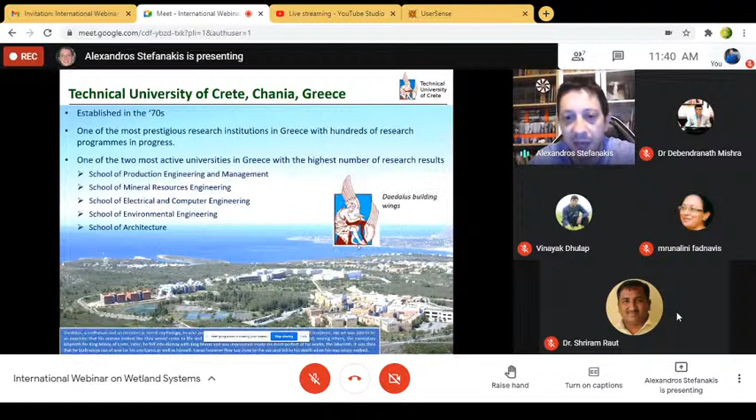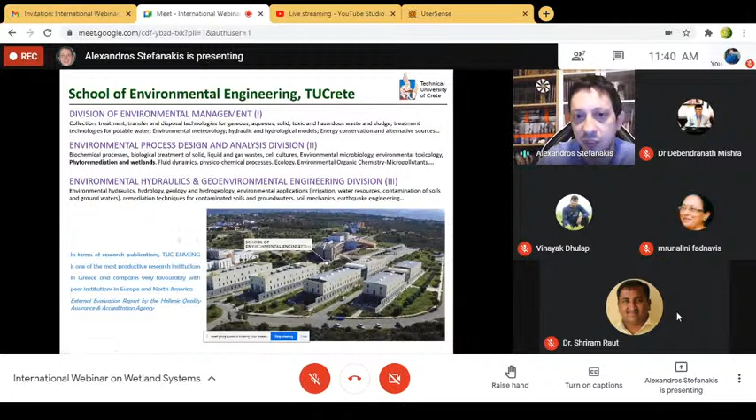So our university is more than 50 years old and is currently one of the one or two most prestigious research institutions in Greece, with the highest research output, and hosts several engineering schools. And I am part of the School of Environmental Engineering, where we have different divisions studying different aspects of the environment. Personally, I belong to the second division, where I work on water and wastewater engineering, and particularly on phytoremediation and wetlands technology.

So I will say a few words about natural wetlands first. What is a wetland in nature as we know it? Then I will move to constructed wetlands and describe how we were inspired from natural wetlands in order to develop this wetland technology that we are currently using for wastewater management. And I will get into more details on wetland systems, the different types, the services, the advantages, and the limitations. And I will show you also several case studies and projects from all over the world.

So what is a wetland in nature? I think more or less everybody has a good idea of this. It's the interface between terrestrial and aquatic ecosystems. So wetlands in nature will have water either at the surface or within the root zone, the rhizosphere, for at least a part of the year, if not throughout the year. So wetlands have unique waterlogged soil conditions that differentiate them from the adjacent upland areas, where there is lower oxygen. And in this way, wetlands support specific plant species that are adapted to these wet conditions, which we call hydrophytes.

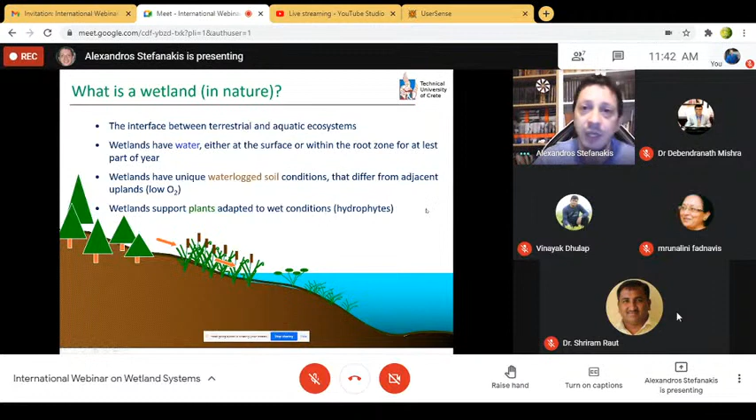And wetlands in nature are one of the most productive ecosystems on the planet, and they have a very high capacity to transform and store organic matter and nutrients. This is one of the main characteristics that we observe in natural wetlands. That's why natural wetland systems are often characterized as the Earth's kidneys. Why is that? Because they operate as the filter. As the kidneys in our body filter the fluids that we take, this is the main service of wetland systems in the planet's ecosystem. They filter water and retain pollutants from the water that flows through them on its way to the lakes, the streams, and the oceans.

So this is the main capacity of natural wetlands that some scientists observed and monitored many decades ago. And this is how the idea was born that we can take these processes that naturally occur and exploit them for our purpose, which is water treatment, but under a controlled environment. So engineers apply these natural cleaning capabilities in constructed wetlands and enhance them for our benefit. And of course, the wetland system is a combination of the modern industrialized society and the natural environment. So this was exactly where the transition from natural to constructed wetlands was based.

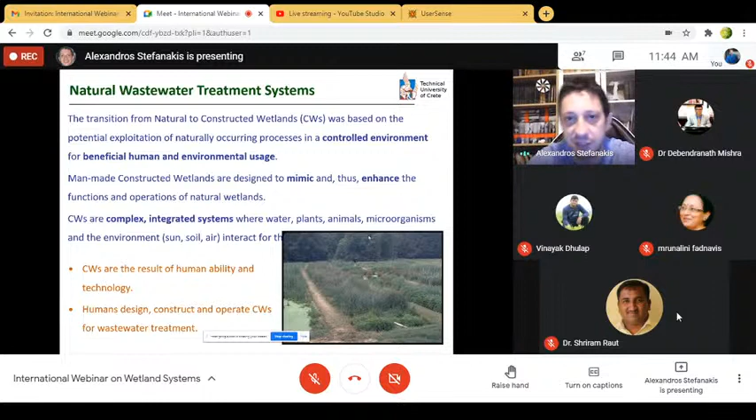So humans make constructed wetlands; we build constructed wetlands in areas where such systems did not exist before, in a way to mimic the natural processes that occur in natural systems. And the whole eco-technology of constructed wetlands belongs to a wider category that we call nature-based solutions for water management.

And what is the idea here? The idea is that we take concepts from nature and we bring them into cities or into the environment where we are living. So we design ideas that are inspired or derived from nature. And what are the services that this type of systems and eco-technology can offer? Of course, the first and the most important one is water purification, but also runoff and flood control, nutrient recovery, retention of heavy metals and recovery of nutrients and other valuable constituents. They offer a broad range of bio and plant-based materials.

They contribute to climate change mitigation and adaptation, while they also regulate the microclimate in the area where they are installed. So overall, we can say that they have an environmentally friendly character, and they are in general characterized by a reduced carbon footprint. We don't use any chemical compounds for the treatment, and of course, they are more acceptable from an aesthetical point of view. We don't use energy, or we use just minimum amounts of energy, and from the financial point of view, the construction can usually be cheaper than the conventional technologies for wastewater management. But the main benefit is during the operation of these facilities, where we have significantly reduced operational costs.

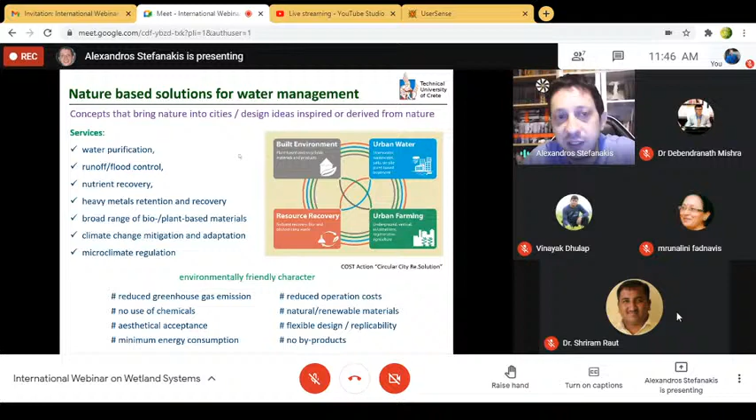So what are nature-based solutions and natural wastewater treatment systems? This is an alternative approach to deal with wastewater treatment than the conventional or mechanical technologies that we all know. And they serve a different approach, which is called the decentralized approach, which some of you may have heard before, to provide an integrated sanitation service.

So it is considered a smarter option for wastewater management: more cost-effective, reduced capital costs, a green and sustainable solution, and it provides increased opportunities for local stakeholders to participate in the decision-making process. Of course, they offer environmental protection and, most important, protection of public health. And because of the decentralized approach and design of the whole wastewater management, we minimize the need to transport or pump wastewater over long distances.

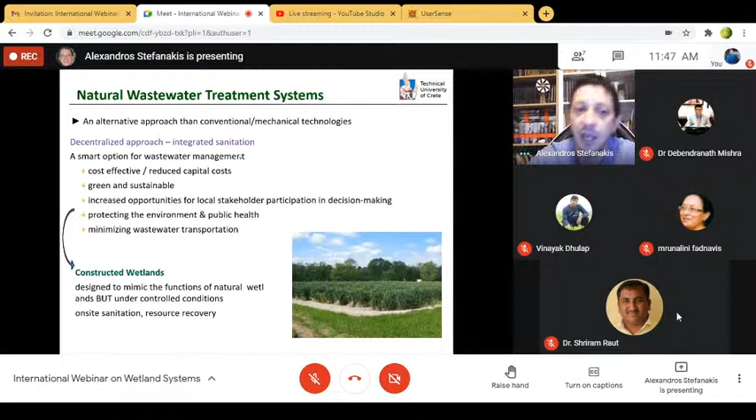So constructed wetlands are designed to mimic the functions of natural wetlands, but under a controlled environment. And in these systems, we have naturally occurring pollutant removal processes, which are mediated by the interactions between the system components. And what are the system components? What is a wetland made of? It's the water or wastewater, the substrate media that we are using, usually gravel and sand, the plants, the microorganisms that naturally develop and grow in the systems, and of course, the environment, the energy we take from the environment. So we use natural responses, gravity flow, for example, or sedimentation, and natural components to build these systems. So you can see the difference from conventional systems, where we also use synthetic materials, concrete, cement. These are heavy installations.

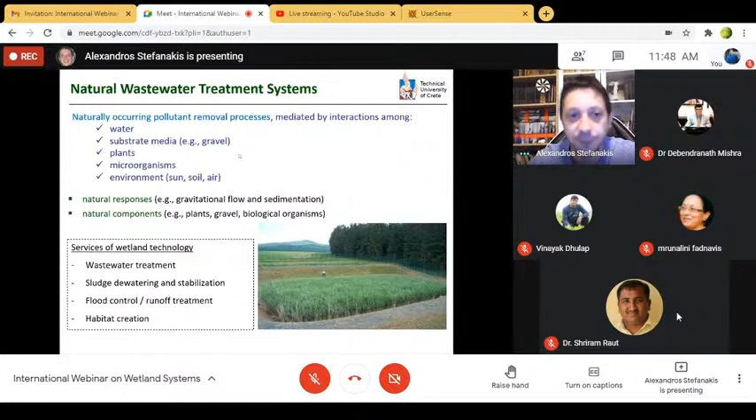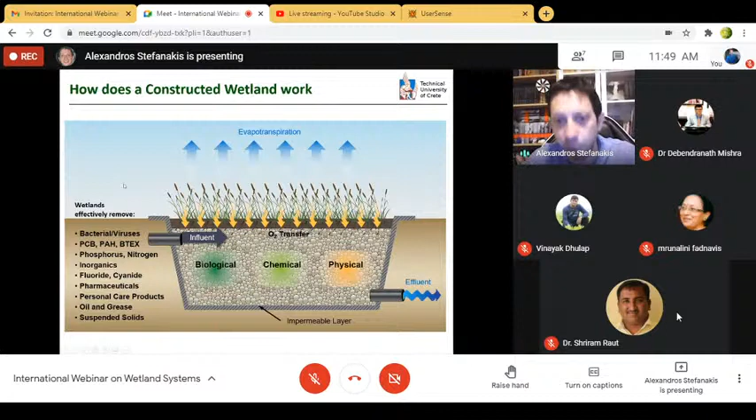And the main services of wetland technology, if we can summarize: wastewater treatment, sludge dewatering as well, flood control, and of course, habitat creation. And this is how a wetland bioreactor, because eventually a wetland system is a bioreactor, functions. We have several biological, chemical, and physical pollutant removal and transformation processes that take place within the wetland body. And because of these different processes, different pollutants that might be present in the wastewater can be removed. So you can see all these pollutants can be effectively removed in a wetland system if, of course, the design of the system is appropriate.

And for wetland technology, we have different types, which can be classified mostly depending on the flow path and the flow characteristics. We have a horizontal subsurface flow system, where the water level is maintained a few centimeters below the surface of a gravel layer. The free water surface flow system, where we have a water column above the soil layer. A vertical flow system, where again we have a gravel bed. The floating treatment wetland, a relatively new system where we have floating mats in a water body where the plants are established. And the latest development of wetland technology, the aerated wetland, where we use small amounts of air provided by artificial means in order to enhance the aerobic processes within the system.

And of course, a very nice application is the application of wetland technology for the dewatering of sludge, municipal sludge or industrial sludge, but usually municipal sludge that is produced from conventional treatment systems.

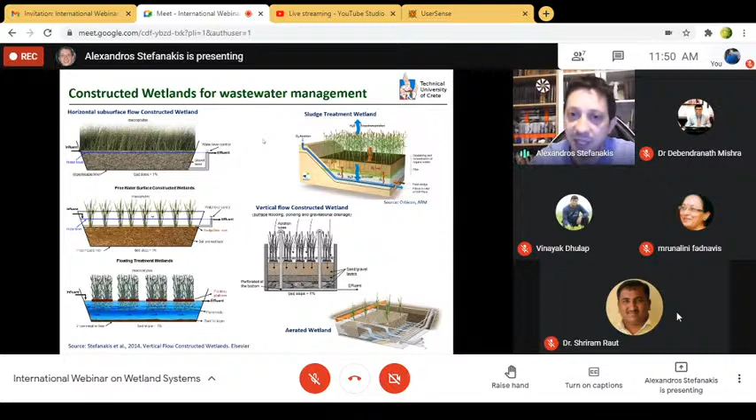So as you can see, there is a wide toolbox of wetland types that we can use depending on the application and the source and the composition of the wastewater that we can use to treat, in each case, this particular wastewater. So if we will summarize the benefits of treatment wetlands and generally of natural treatment systems compared to a mechanical technology, this would be a nice summary of the benefit, the advantages in comparison.

So the main limitation will be that a wetland system would always have a higher area demand compared to a mechanical technology. Since we are talking about the natural processes, these processes are always slower, so we will need more land. But in terms of costing, to build such facilities, the cost will be more or less the same, and especially if the land is available, it can be even cheaper.

But the advantages are from the operational phase, so we have significantly lower cost, minimum demand for energy input, long life expectancy. We don't need usually specialized staff to run the facility. We can design the system even with integrated sludge dewatering and sludge management. And if the system is properly designed and constructed, we can avoid issues such as odours or mosquitoes that could be present in mechanical technologies.

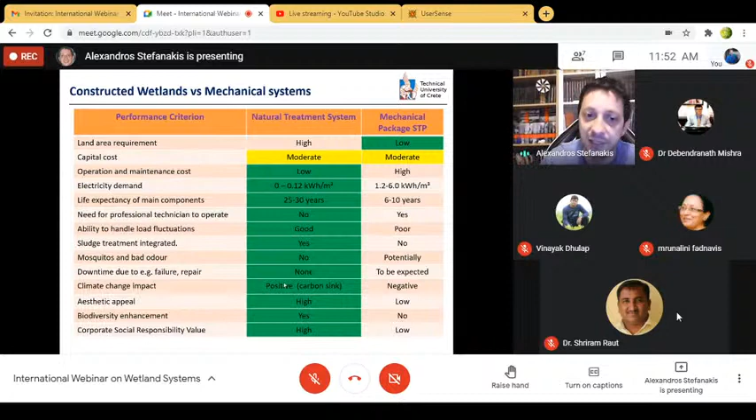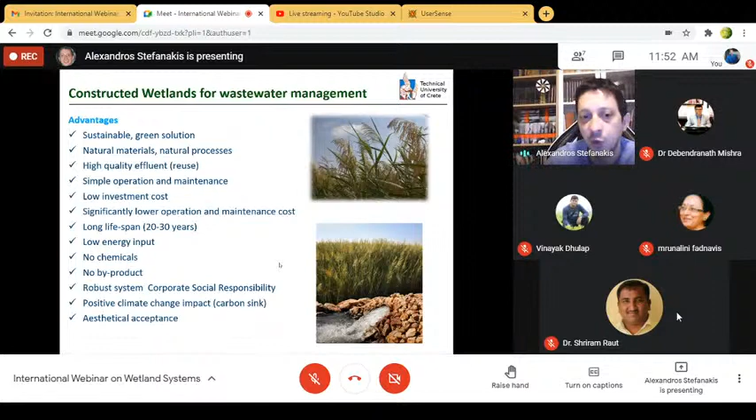And of course, the whole design, the whole nature of the system is environmentally friendly and has an ecological character. So to summarize the advantages, as you can see here, low investment, long lifespan, low energy input. We don't use chemicals. There is no byproduct from the operation of these facilities. And of course, it's also important when we apply them for industries because they improve the green profile and they could be integrated in the corporate social responsibility activities of the industries.

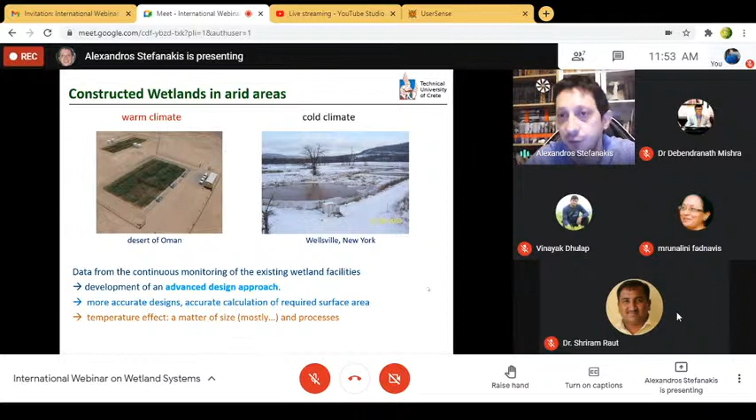And in terms of application, we have systems now that are applied even in the desert, so under very hot and arid climate, or even under cold climates, as you can see here. And the effect of the temperature practically would be reflected in the sizing of the system. So we have now developed advanced design approaches to design wetland systems so that we can produce more accurate designs and calculate with very good accuracy the required surface area, where also in the design the temperature effect is considered.

So now I will show you different projects and case studies from all over the world, from hot and warmer and arid areas. So one of the most interesting applications is the wetland systems which are designed for stormwater management. So what we do here is that we receive the stormwater, the runoff from the urban catchment or the combined sewer overflow, and instead of driving it through the conventional wastewater treatment plant, we will drive it through a stormwater retention pond and constructed wetland before it reaches the receiving body. Could be a river, could be a lake, could be the sea.

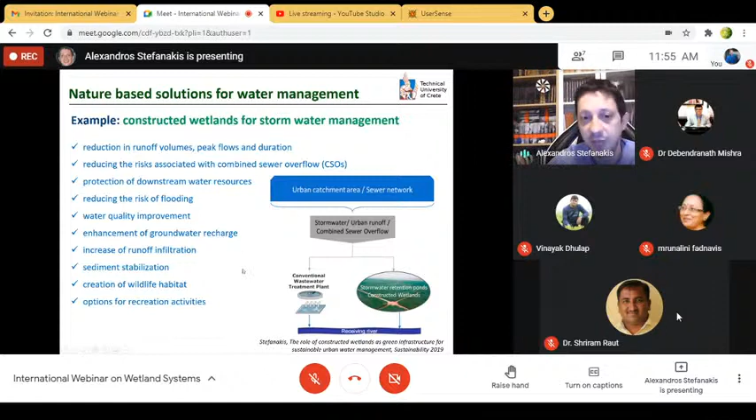So in this way, we can reduce the runoff volumes that pass through a conventional wastewater treatment plant. In this way, we can minimize first the capacity and the sizing of these facilities. We can reduce the risks associated with combined sewer overflow wherever this exists, protect the downstream water resources, reduce the risk of flooding, improve the water quality. There are many cases where we use the effluent to recharge the groundwaters, to increase the runoff infiltration, and of course to stabilize the sediments, and we create a new wildlife habitat and provide recreation activities as well. These are some full-scale operating systems.

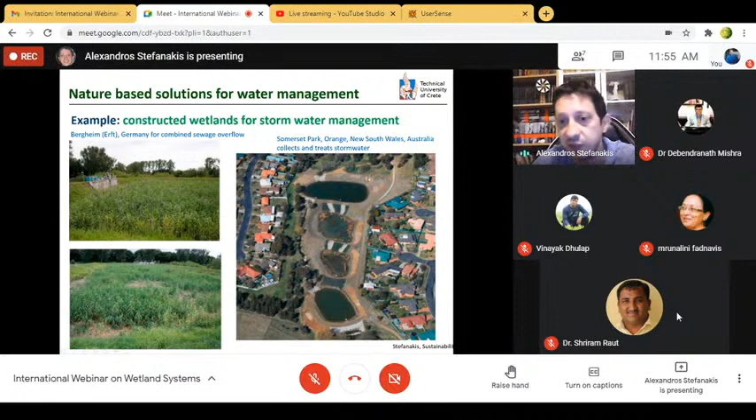So this is a runoff stormwater wetland in Germany, which receives and treats combined sewage overflow. This is a system built in Australia, which collects and treats stormwater. And as you can see, it is installed within the residential area. So these are some nice examples. Another system for stormwater management from the US in Phoenix.

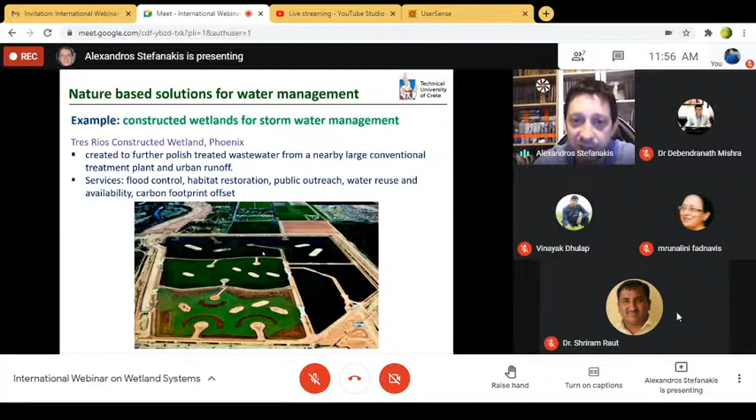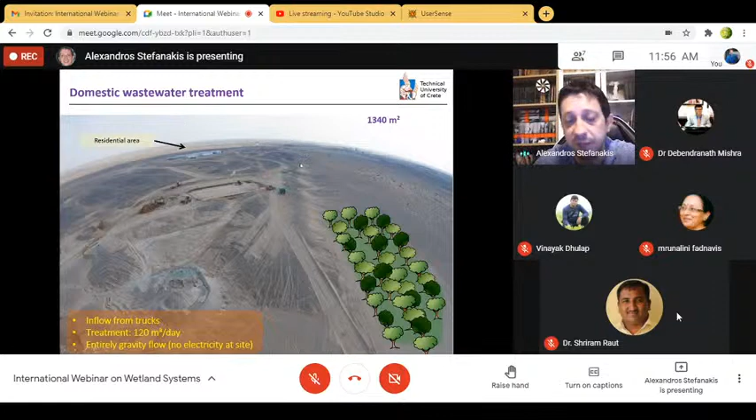Another system for domestic wastewater treatment, this is built in the desert, so in a very hot and arid environment. So there is a settlement here which has a population of 600 people, and we built there a facility with 2 stages, vertical flow constructed wetlands, where we integrated in the first system sludge mineralization and dewatering.

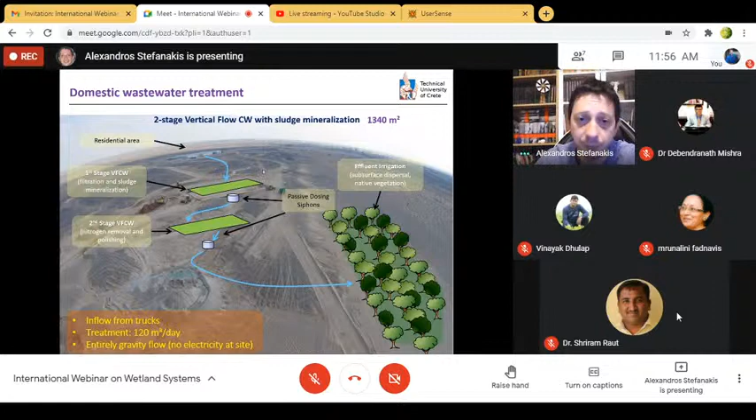So we don't have sludge production as a byproduct on a daily basis, as would be the case in conventional wastewater treatment plants. So after the treatment in the two-stage wetland, the treated effluent goes with gravity flow to an irrigation field where we have created a small oasis or forest, however you want to call it, on site. So this facility treats 120 cubic meters per day.

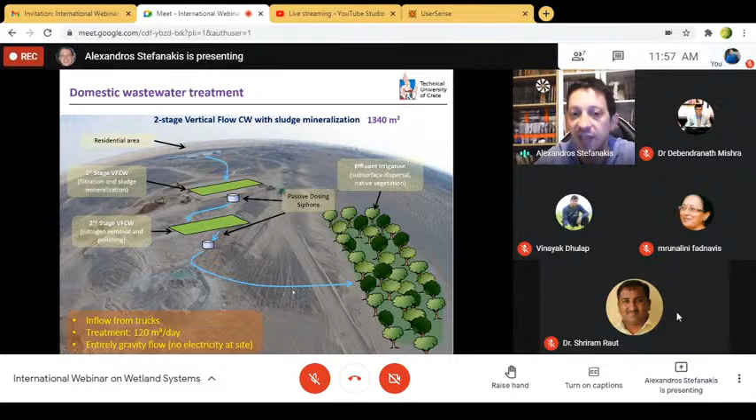And the interesting thing here is that we don't use any electricity. So the wastewater comes from tanker trucks. It is discharged here, and only with gravity flow, it passes through the system until the irrigation field. So we don't have any electricity input on this facility. So this is a picture of when the truck comes and discharges the wastewater in the first stage.

An aerial view of the two stages of the wetland facility, how the system looked just after the first planting of the reed plants, and how it looked one month after planting. And here you can see how sludge is integrated and dried in the long run on the surface of the first stage. So in this way, because of the presence of the reeds and the roots of the reeds, we have this sludge dewatering process, which means that we don't need to have a separate line for sludge handling.

And this is important. Why? Because in conventional wastewater treatment methods like activated sludge, membrane bioreactors, sludge is a daily byproduct that needs daily handling. So you will have maybe a filter press or a centrifuge to dewater sludge that is produced there. But this means that these systems are very expensive to install and especially to operate. They have a very high energy input.

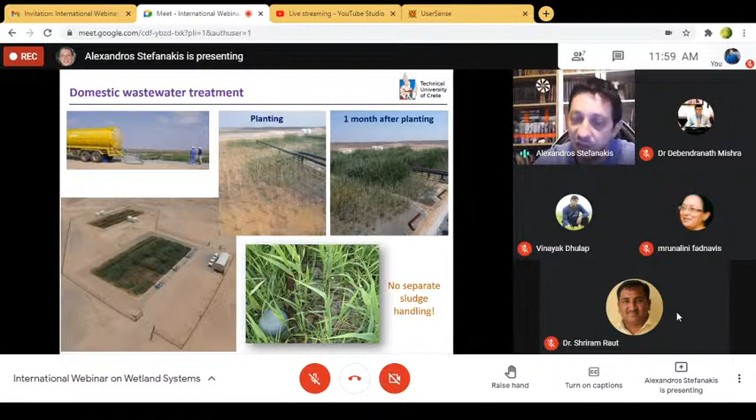So there are many cases where just the cost to run the sludge handling line represents up to 50%, so half of the overall cost of the wastewater treatment plant. So to have a natural process for sludge dewatering and handling without a separate line is really important.

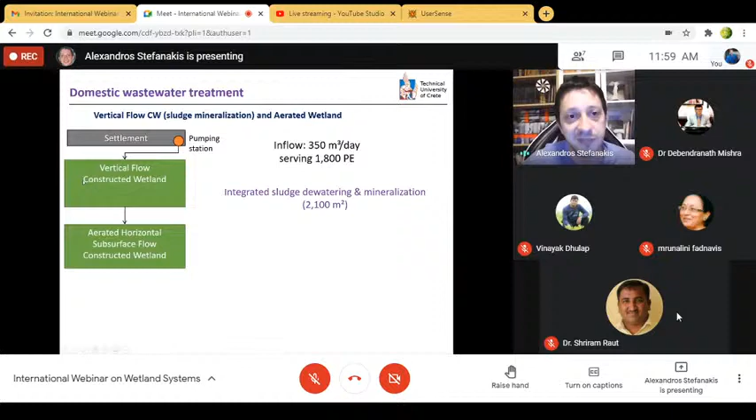Another design for domestic wastewater treatment is this one, where we use the latest development of the aerated technology. So here we are serving almost 2,000 persons. The first stage of the facility is again a vertical flow system with integrated sludge dewatering, and the second stage is an aerated horizontal subsurface flow constructed wetland. Afterwards, we have disinfection with a UV system, and the effluent is reused in the residential area for irrigation of green spaces.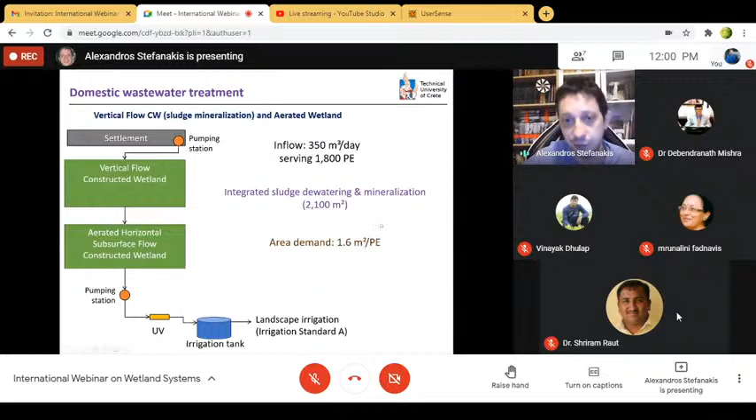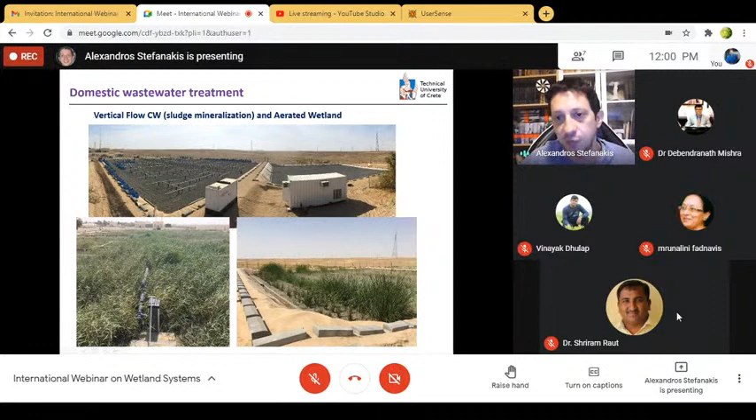So this system has one of the lowest area demands for wetland technology, approximately 1.5 to 1.6 square meters per person. This is how it looks during the construction, and these are some pictures of the facility during the first months of operation, the first stage and the second stage. And from the first stage to the second stage, we have gravity flow. So we only have pumps upstream to bring the water to the first stage, and downstream to collect the treated effluent to send it for irrigation in the residential area.

So if we compare constructed wetlands with the conventional technologies in terms of energy, operational and maintenance needs, and area requirements, you will see that in terms of energy and maintenance, we are on the least side. So the natural treatment systems in general have very low demand for energy and operational and maintenance needs, while they will have a higher area demand.

But as we developed advanced designs for wetland systems, so intensified wetlands like the vertical flow design or even aerated wetlands, we somehow close this gap, which means that we can even go into areas where space is more limited, where we don't have this high availability of space, like in suburban or even urban areas.

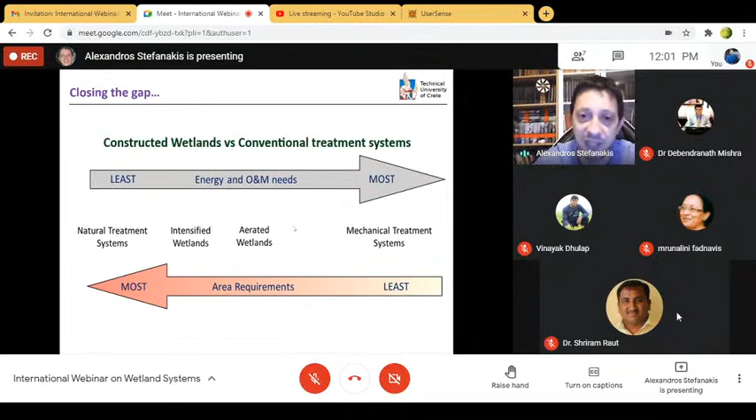Another example for an industrial effluent. So this is a glass manufacturing industry. It's not very common that we have such industries with wetland systems. This is why I selected this case study, just to show the capacity of the technology. So this small industry consumes 30 cubic meters per day of fresh water for the industrial manufacturing process and generates approximately 10 cubic meters per day of wastewater. And what they do, they have a collection tank, and they pump out and truck out the wastewater to a wastewater treatment plant.

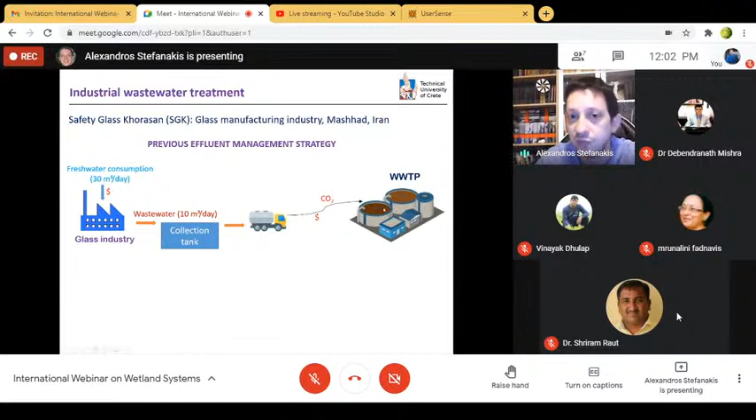This means that this process costs some money for the transportation, and of course, it has an environmental footprint. There are some greenhouse gas emissions related to this process. So the solution that we sought here was to reduce the cost for the overall wastewater management, and also to reduce the fresh-water consumption for the industrial processes.

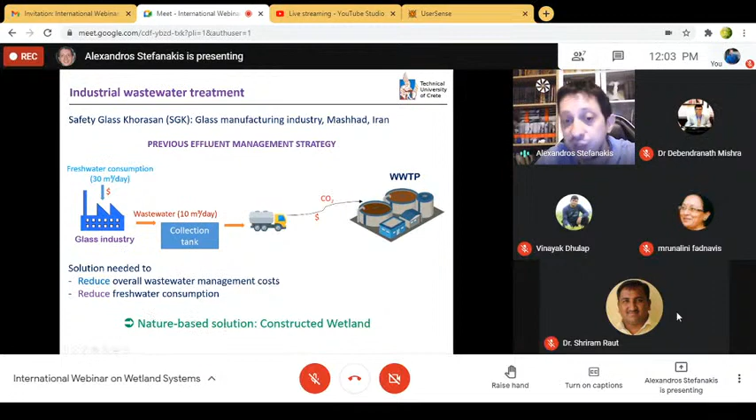And this is why they decided to test a nature-based solution, a constructed wetland. Of course, this is quite a unique application. So the first step would be to go to a pilot scale system to test, verify, and optimize a design for this particular application. And the second step will be to then upscale this design and build the full-scale system.

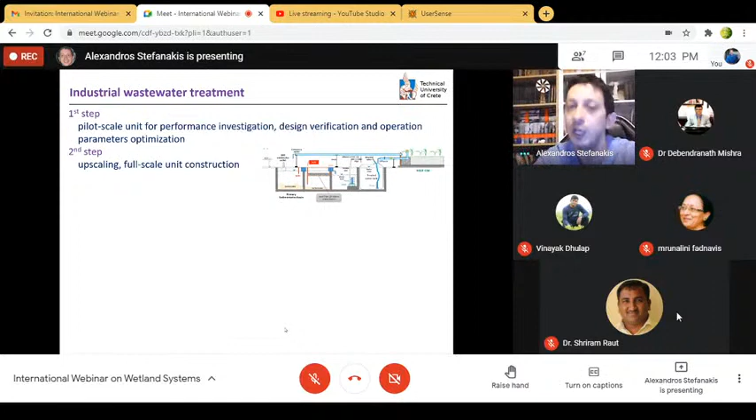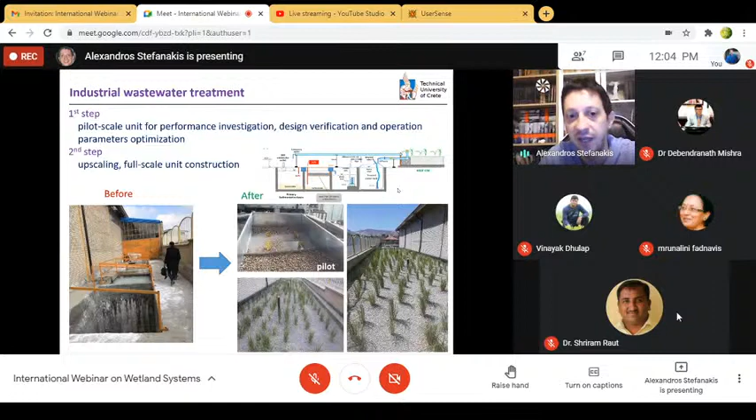So this was done. This was the simple collection tank that they had before. And after the small pilot that we built to verify and optimize the performance, we proceeded with the construction of the full-scale wetland facility. And as you can see in the picture, another advantage is the flexibility of the design of such systems. So we can design the system to fit within the available area and shape of the land within the premises of the industry.

So from that strategy of managing the effluent of the industry, we moved to this strategy. The wastewater is now treated in the constructed wetland, while the effluent is recycled back to the manufacturing processes. So in this way, the small industry managed to reduce the freshwater consumption, reduced the overall cost for the wastewater management, and eliminated the CO2 emissions from transporting the wastewater to a centralized facility.

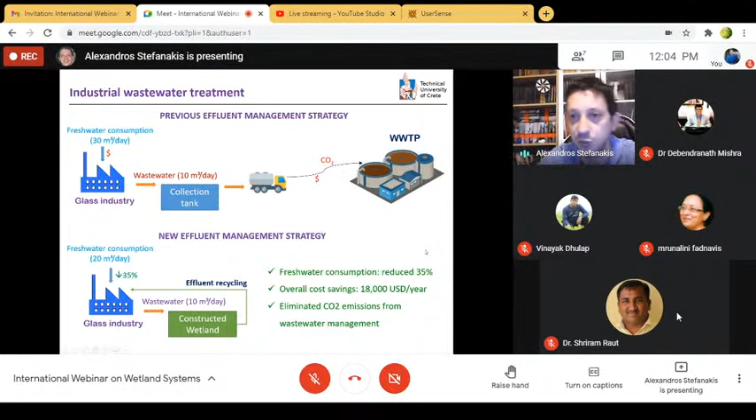More case studies here about sludge dewatering. This particular application is to receive and dry sludge from municipal wastewater treatment plants. These are some pilot beds that were built in Jordan to again test and optimize the design there. And currently, the full-scale sludge treatment wetland, as we call them, is under construction.

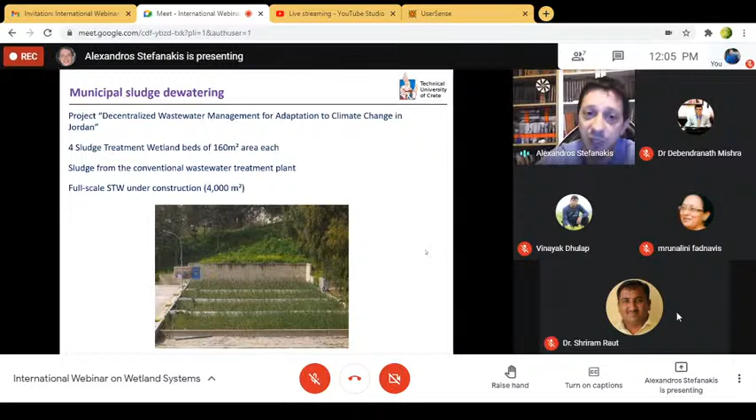Another system was designed in Oman for a 5-star resort. So what was the problem here? There was this 5-star resort, and they had an MBR, membrane bioreactor facility, to treat the wastewater from the resort facilities. But the sludge that was produced on a daily basis, they had to transport to a centralized facility located almost 80 kilometers away. You can imagine that this had a cost for the resort, and of course, it was also related to greenhouse gas emissions.

So we installed a sludge treatment wetland to receive and dewater the sludge from the MBR unit. And take notice, as you can see here, that the wetland facility is located only 17 meters away from the pool and 70 meters away from the bungalows and the villas. And this has been running for 7-8 years, and there are no complaints about mosquitoes or smells in the area. I remind you, this is a hotel. This is a 5-star resort.

So it's a very good case study that proves that if designed and built properly, we don't have any issues with smells or mosquitoes, which is usually the first or second question that we get when we introduce this technology. And of course, the dewatering there is done without any chemicals and with only a minimum amount of energy for a small pump that is used to pump the sludge to the bed.

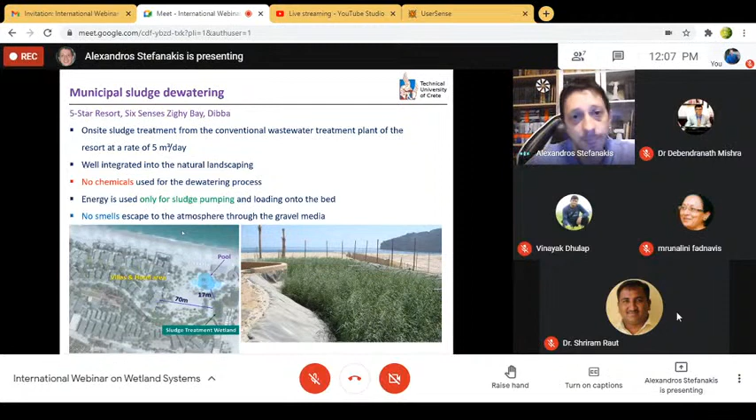So how does the sludge dewatering wetland work? We have continuous sludge applications for a cycle that could go up to 8 or 9 years, depending on the sludge loading rate. This is how the system looks just after fresh sludge is applied, and how the sludge is dried, and you can see the cracks that are formed on the surface, and specifically the ring that is created around the stems of the reeds. This is how air is introduced in the sludge layer, and the hydraulic conductivity of the bed is maintained.

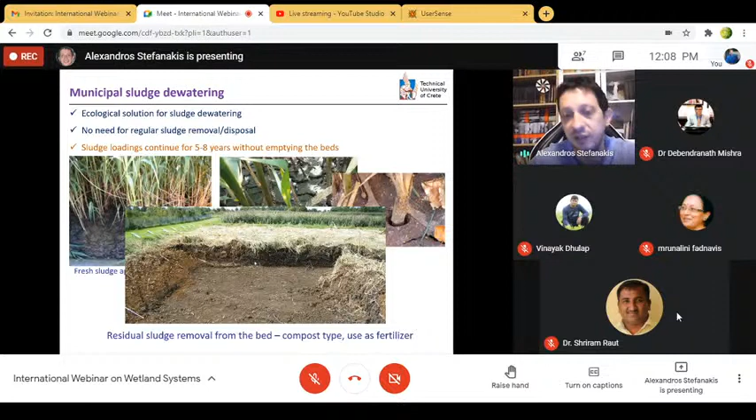And you can see an example after 8-9 years of this cycle of operation. We have a nice layer of approximately 1 meter of compost-type, digested sludge material built within the bed. The brown color of the sludge that you see here indicates that this is an aerobic sludge. So we had aerobic processes in the bed. Why is this important? Because if we have aerobic processes, it means we don't have any bad smells. So after this digested sludge builds up, we remove this compost-type material and give it to farmers, where it's used as a fertilizer on agricultural land.

Another very interesting application is in the industry for oily produced water treatment. What is oil field produced water? From the oil and gas exploration and separation there is a produced water that is generated on a daily basis. So this residual wastewater from the oil and gas industry contains oil hydrocarbons, different fractions, heavy and light hydrocarbons, can be brackish or even saline. And of course, there are huge quantities produced on a daily basis.

To give an idea, for every barrel of oil that is produced, we have 5 or up to 10 barrels of this oily wastewater generated. So you can imagine that we have millions of cubic meters of produced water generated globally from the oil and gas sector internationally. And this is why the water management often imposes a bottleneck on the management, on the pricing of the oil.

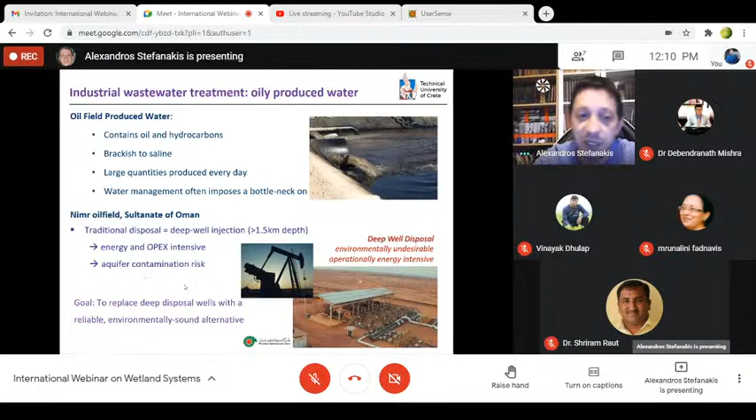So in this case, we are in the Middle East, in the oil field, where the traditional disposal method is the so-called deep well injection. So in the oil industry, what they do with this water, they re-inject it back to the reservoir, which means that they will have to reintroduce and pump this wastewater to depths of 1.5 and 2 and more kilometers. So you can imagine the energy that is needed to send this water to these depths. And this picture shows only one facility with pumps, just one location with these deep well disposal pumps.

So the goal here was to replace these disposal wells with a reliable and environmentally friendly alternative. So we used again the technology of constructed wetlands, and this is the system that was built, which currently is the largest constructed wetland system built in the world. So the area of this facility is almost 5 million square meters, so 500 hectares. And initially this facility was designed as a zero discharge, which means that downstream there are evaporation ponds and salt works to simply evaporate the water.

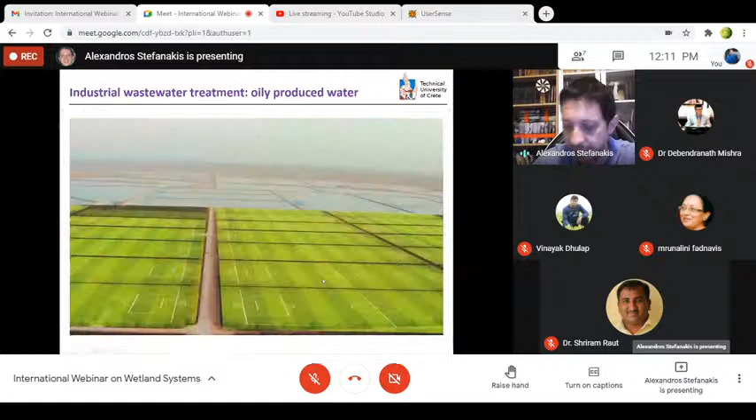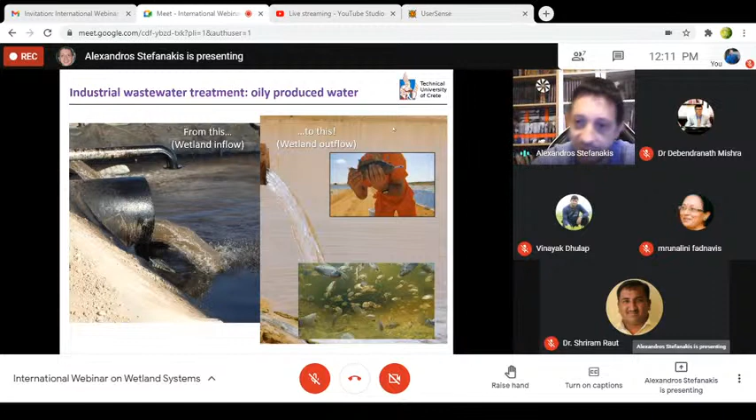So the treatment capacity of this facility is 175,000 cubic meters per day. To give you a better feeling, the size of this wetland system is equal to 1,200 football fields. So from this inflow of the oily produced water, we reach this outflow. And in fact, we grow fishes there, which is a very good indication, since fishes can survive, that this water has a limited toxicity.

So what is the overall performance of this facility? The main goal here was to reduce the oil in water content to the discharge limit, which was 0.5 ppm, so a very strict discharge standard for total petroleum hydrocarbons. And as you can see along the wetland length, in the outlet, we reach this very strict limit. So we have almost complete removal of the oil hydrocarbons there.

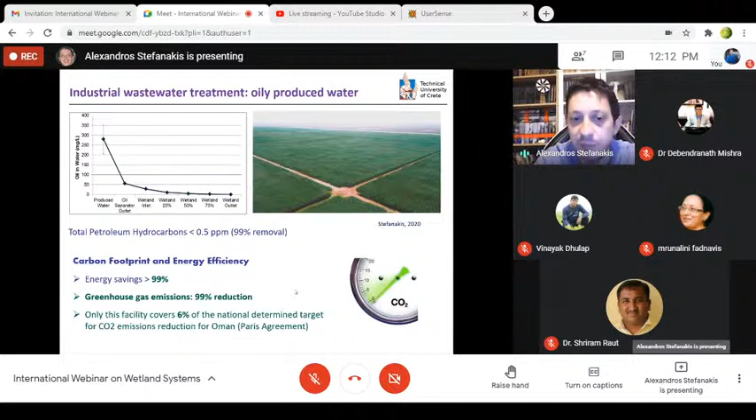But what is more fascinating here is the overall environmental performance of this facility. So we have energy savings compared to the previous solution for produced water management, the deep well disposal, that exceed 99%. So imagine we have 99% less energy used compared to the previous solution. And of course, this translates to 99% reduction of greenhouse gas emissions. And in fact, this facility alone contributes 6% to the overall national target of the country of Oman to reduce emissions according to the Paris Agreement.

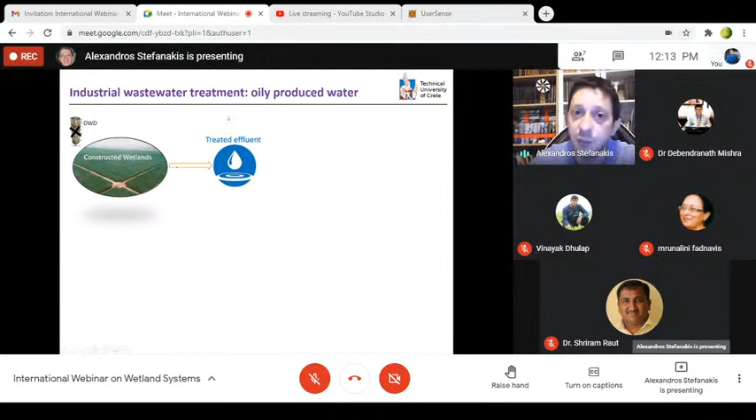And this facility is a very good example of how we can integrate the constructed wetland technology in a more circular and sustainable way of managing not only produced water, but also wastewater in general. So the first step would be to replace conventional technologies or deep well disposal with a constructed wetland. So by this, we have a treated effluent. So what can we do with this beyond just discharging to the environment? We can use it to produce aquaculture through research and development. For example, we can produce shrimps.

We can use it for irrigation. So in this case, since the water is brackish, we can use it for biosaline agriculture. Biosaline agriculture is the agriculture where we irrigate crops or trees, plants that are salt tolerant, that can be irrigated with brackish or saline water.

Or we can go to conventional desalination, so reverse osmosis, which will be powered with a solar farm, so we have renewable energy, to go to more traditional agriculture like date palms in that area, or fodder grass, or simply vegetables and crops. So as you can see, the concept here is not just to reuse the treated effluent to make the place look green, but to irrigate crops and plants and trees that have a market value.

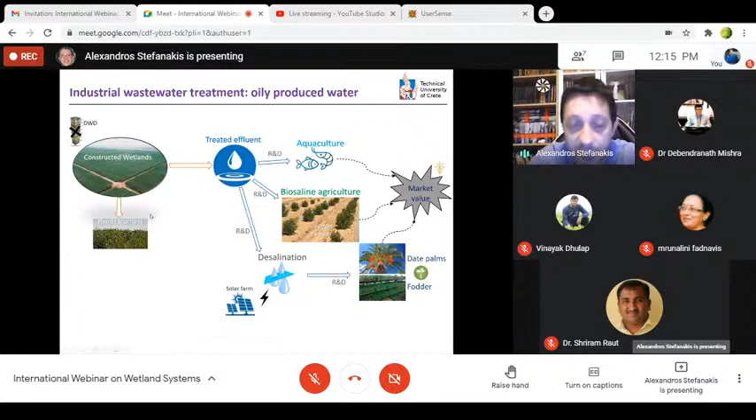That is the concept, so that we can then generate an additional income and stream of revenue for the stakeholders, for the company, and also more jobs for the local people. And furthermore, from the wetland, we have biomass, real biomass that is produced. So what can we do with this? We can use it to make compost, which then we can use in the agricultural field. So we close the loop completely.

Or we can use it to produce biogas, which then is used to cover the small energy needs for the operation of the whole facility. So by doing this, we practically eliminate the CO2 emissions, the carbon footprint of the whole process there. And this means that we can generate carbon credits. So another income for whoever is the operator there. And this is already done.

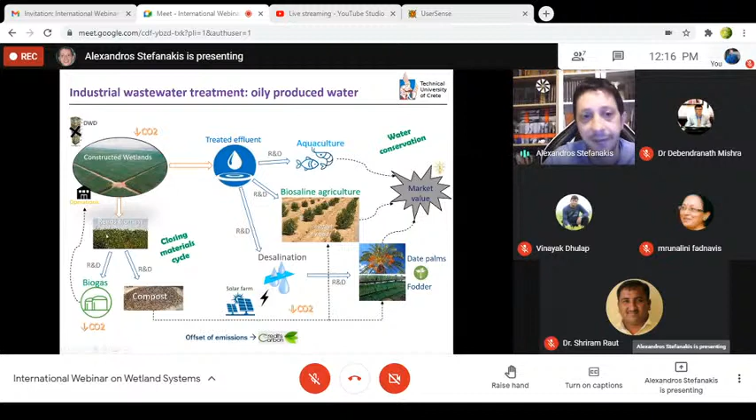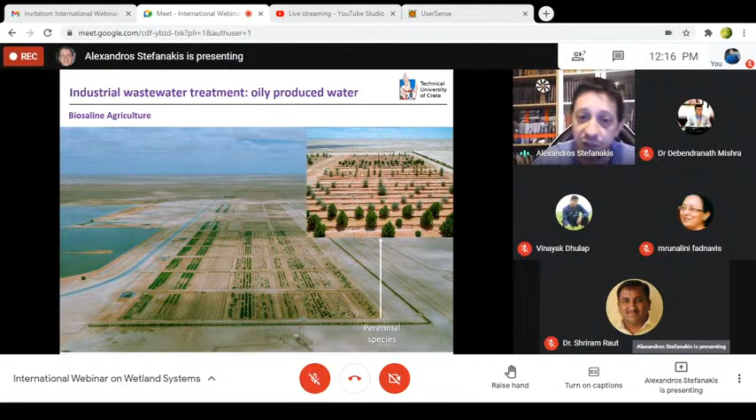And of course, we conserve water, we save and protect freshwater resources, and we close the cycle of all materials, water, or biomass that are produced in this whole process of managing the wastewater. And this is an example of the facility where we have this irrigation field as a large-scale research. So we built 220,000 square meters of irrigation field where we tested different crops, different trees, salt-tolerant trees, irrigated with the treated effluent from that facility. So we had perennial species, annual species, and grasses.

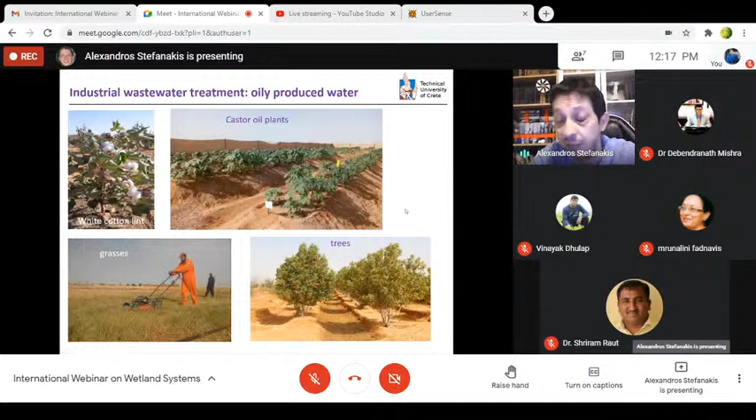And to give you some ideas of the plants we tested, we irrigated cotton, several plants of biofuels, such as the Ricinus communis, or maybe you know it as the castor oil plants, grasses that are used as fodder, and trees that will give a wood biomass, which could be used then in the market, or trees that are, for example, eucalyptus trees that are valuable for the cosmetic industry.

And it is very interesting that from the biofuels that are produced in this way, we had 2 years ago the first commercial flight of Etihad Airways from Abu Dhabi to Amsterdam, where 50% of the fuel in that flight came from biofuels. So you can see the potential here that opens up, especially considering that the aviation industry is looking to invest in such greening options, because they want also to reduce the carbon footprint of their processes. So reusing treated effluents, and especially wastewater that has been treated naturally in an ecological system, is very attractive.

And some nice environmental benefits and further ecosystem services. So by building a wetland, and in this case, this huge wetland in a very hot and arid environment, this has attracted several birds and other wildlife. And there are more than 130 different bird species that have been detected in that area, where they find a stopover during their migration between Asia and Africa.

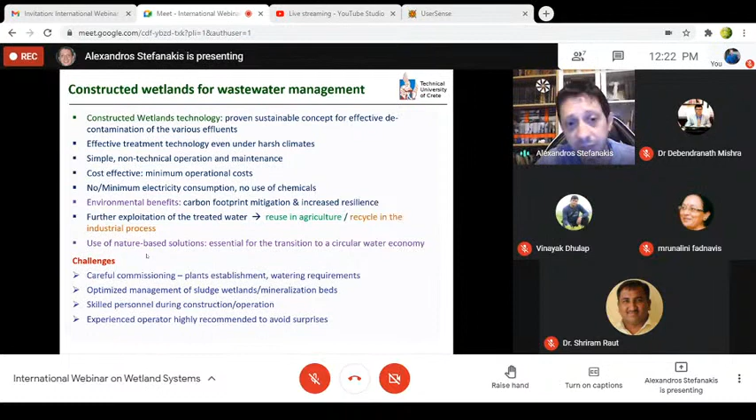These systems failed. They didn't reach any standards and failed to provide the services they were initially designed for. So these are the remarks to keep in mind. And by this, I close my presentation, and I hope I covered most of your questions. Thank you very much.

Thank you so much, Dr. Alexandros, for giving a nice presentation. In this presentation, you have covered many things from basic to applied, and you have covered many industrial as well as domestic wastewater treatment processes. We have received many questions from many areas, from India as well as from abroad, and I think you have covered many questions in your presentation.

You have covered climate change related questions, the questions related to agriculture, then GIS remote sensing related questions, and even the industrial applications. So you have covered many aspects, but 2-3 questions, I think, are important. That question is a general question, but you will give clarification on that particular question.

One question from an environmental economics research student: water hyacinth plants, suggest any possible ways to remove the plants to improve the water bodies. So this is one question. And career opportunities, if you give some ideas, what are the scopes or the opportunities after PG or UG or from the research point of view. That will be good for the students as well as the participants present here to know.